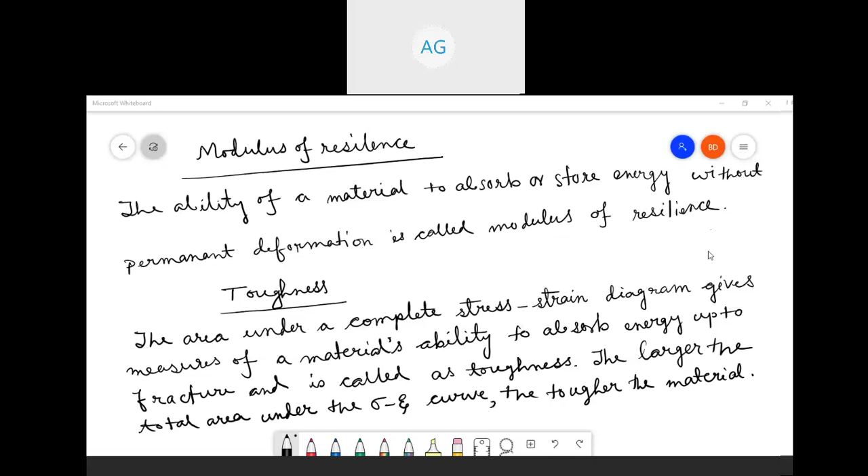So you should also be conscious about the things whatever you have not got. Every time he is telling about these things. So Ilyas, what is he saying actually? Do you understand? Yesterday, did I complete everything? Yes sir, or it was suddenly cancelled due to the time limitation.

You at least give me the last line of your notes from yesterday's class, so that I can understand up to where you reached. I think he is telling this, but because of his network issue his voice is breaking. So please help him, he is trying to do something. You are not backing him up, you people at least back him up, no? So do it, is it complete or not?

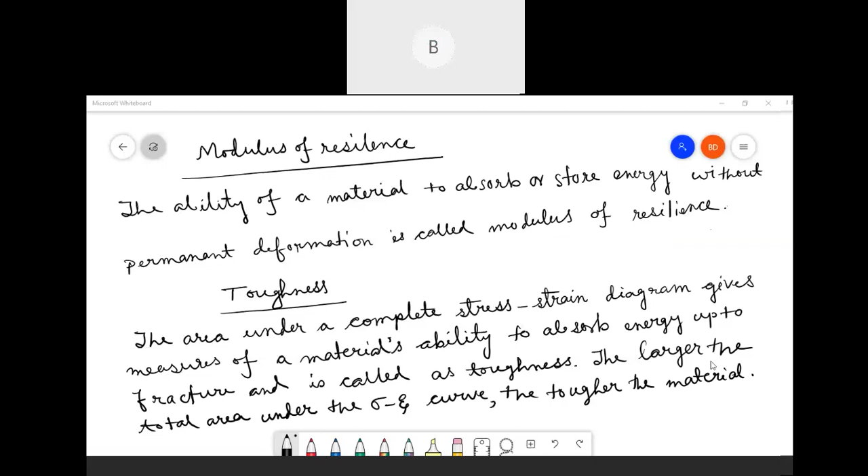This screen? Completed, sir. Okay, so you have to help your friend. If somebody wants to say something but is not able to express it, you have to help him.

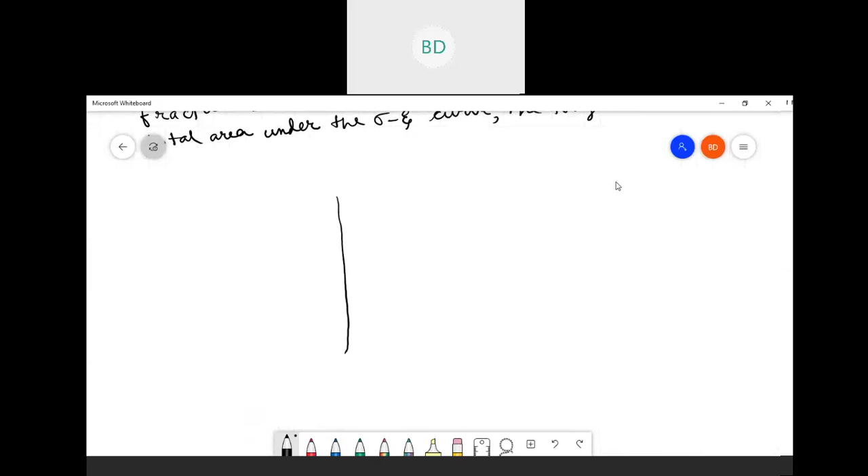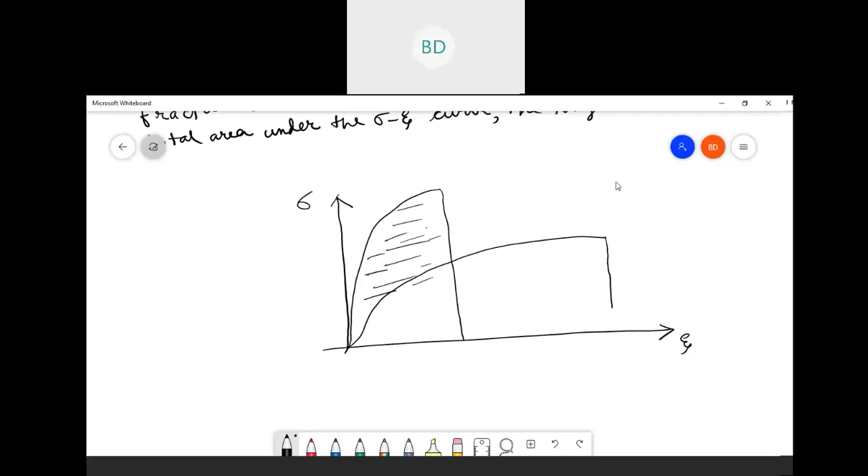Now you have to draw one diagram, this diagram is very informative actually, see how, I'll show you. This is strain, this is stress. Then drop a perpendicular line from here to here. Put some dash line. Then draw another curve. Draw a perpendicular line. So take a point here and drop a perpendicular line, this is also perpendicular. Mark this with another shadow. Then from here you draw a line like this.

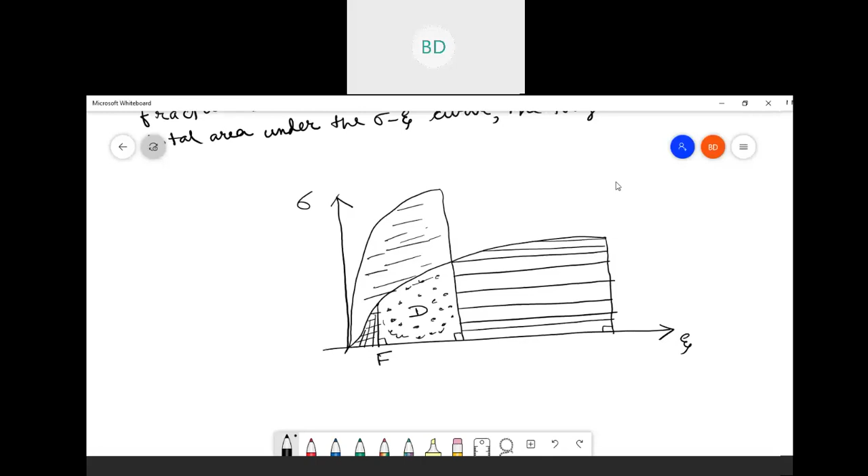I am showing the various regions under the stress-strain curve. So mark this point as F. Suppose this region is D, this region I am putting like this. So let me do one thing. Take this region, this point is your F.

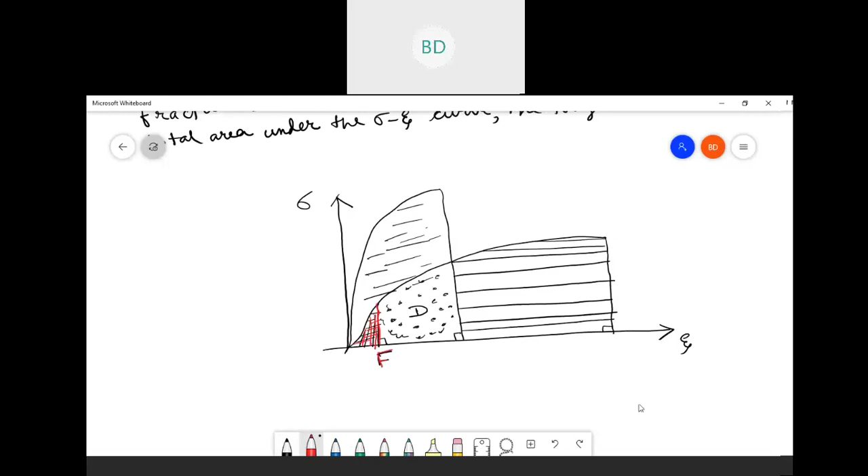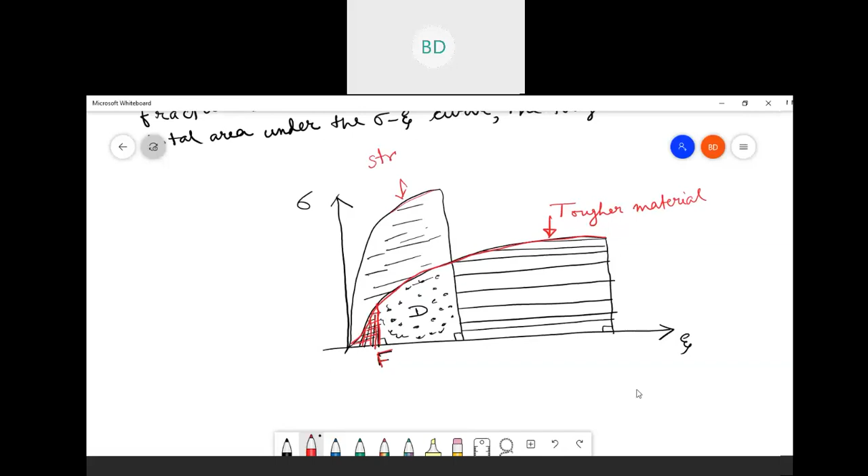So what is this curve? This curve is for tougher material because tough material is that which has more surface area under the stress-strain curve. So the area under this curve, if you look at, is more than this curve. So this is a tough material. And what about this? This is a strong material. Why strong? See, its sigma value, ultimate, that is UTS, sigma UTS, is high. And here you see sigma UTS is below, this is sigma UTS for the other material. So it is below, so it is a strong material, it is a tough material.

Then this portion, let me select another color. So this portion is your elastic resilience. Since it is under the elastic region, so it is your elastic resilience. What is resilience? Resilience is the ability of a material to absorb energy. So as a human being, if I want to ask, do you want a strong man or do you want a tough man? What would you like to have, which quality? Can you hear me?

Sir, can you hear me? Yes, sir, we can hear you.

Which quality do you want to have in you? Tough or strong? Do you want to be tough or do you want to be strong?

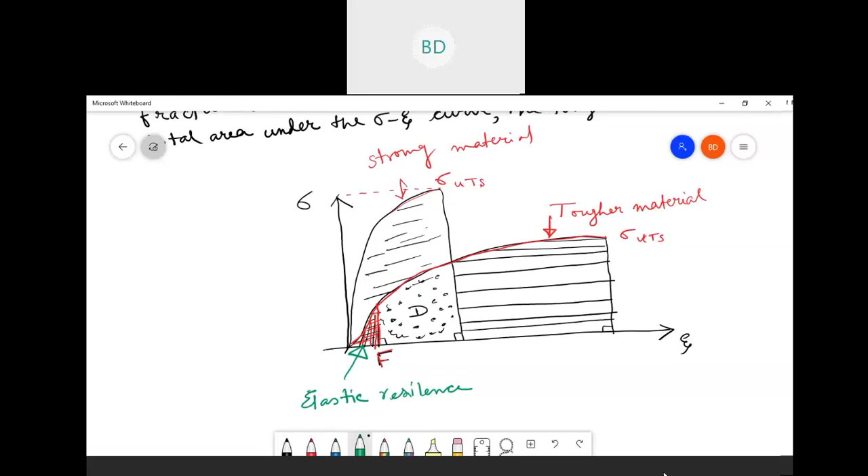So now you have to draw this diagram to understand the resilience, the strong material, the tough material. Okay, let's move on. Now one simple question we have to answer, exercise type.

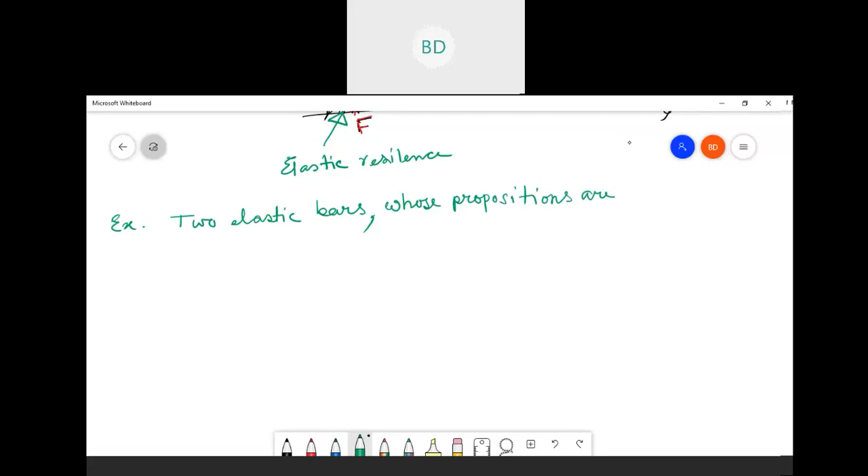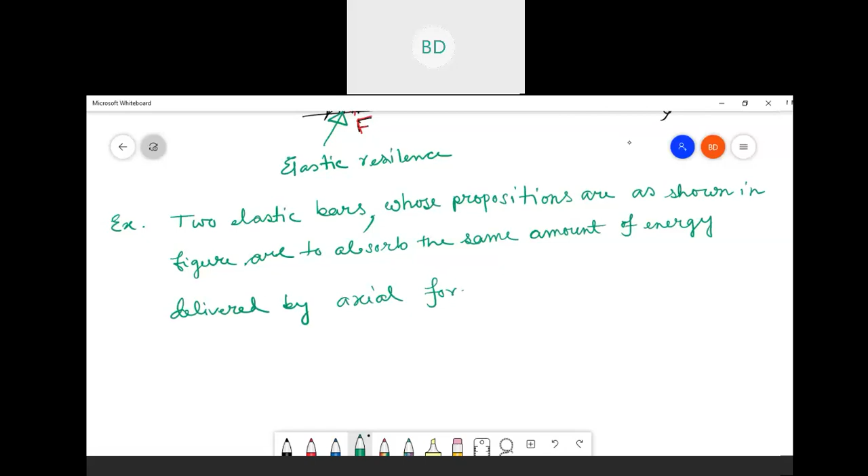Suppose two elastic bars whose propositions are as shown in figure. I'll draw this figure as shown in the figure, to absorb the same amount of energy delivered by axial forces at the free end, neglecting stress concentration. So do you know what is stress concentration?

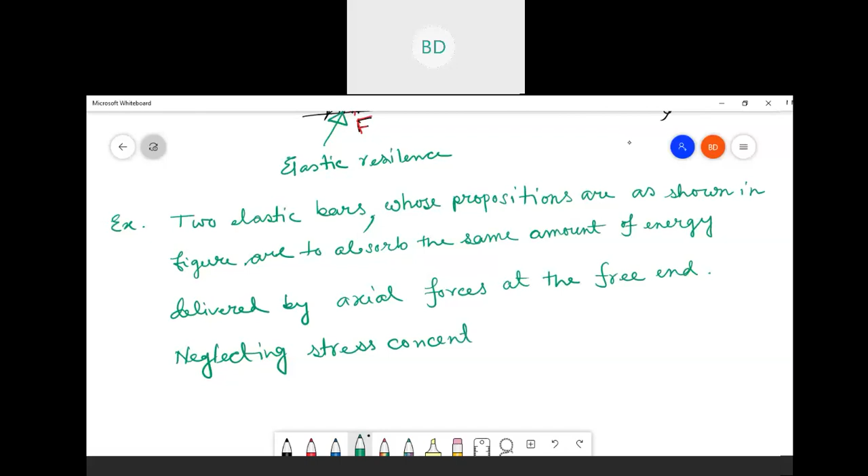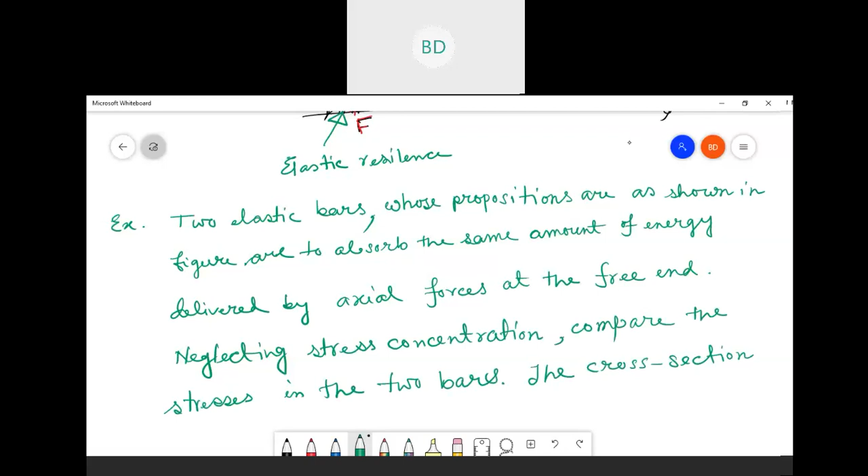Compare the stresses in the two bodies, in the two bars. The cross-sectional area of the left bar is A and that of the right bar is A and 2A.

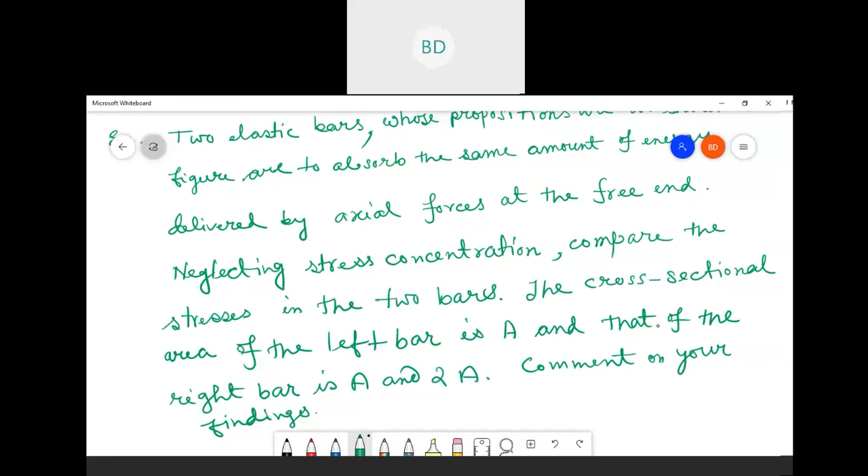Comment means comment on your findings, whatever result you got, you have to comment. Because as an engineer, your duty is not just to solve the problem, you have to explain, you should know the physics of the problem, why it has happened. That is very important from an engineering point of view, explanation. Now let me draw that figure.

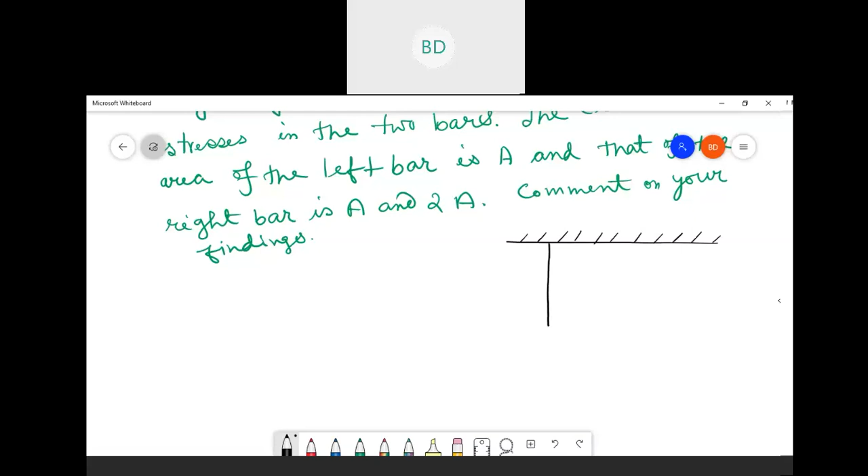So area of these two are A, and area of this bigger one is 2A. The length is L, and here it is also L but divided. This is your 3 by 4 L and this is your 1 by 4 L. So ultimately L. So both bars are of same length.

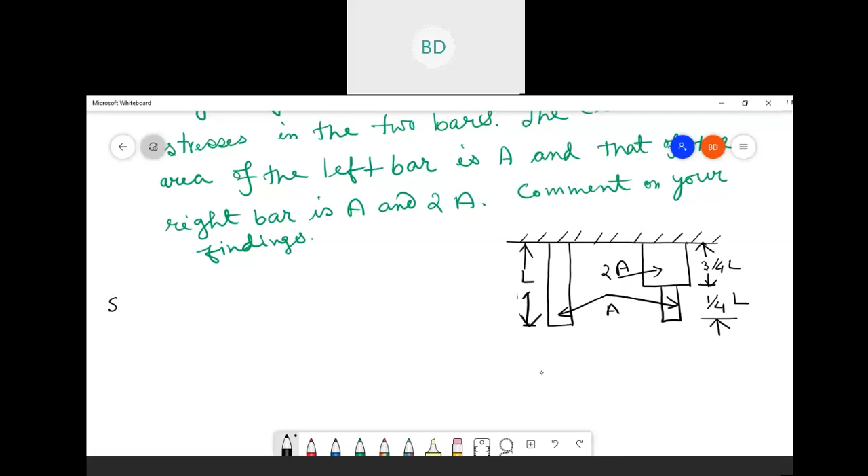Okay, throughout the normal stress, therefore the normal stress sigma 1 is constant throughout.

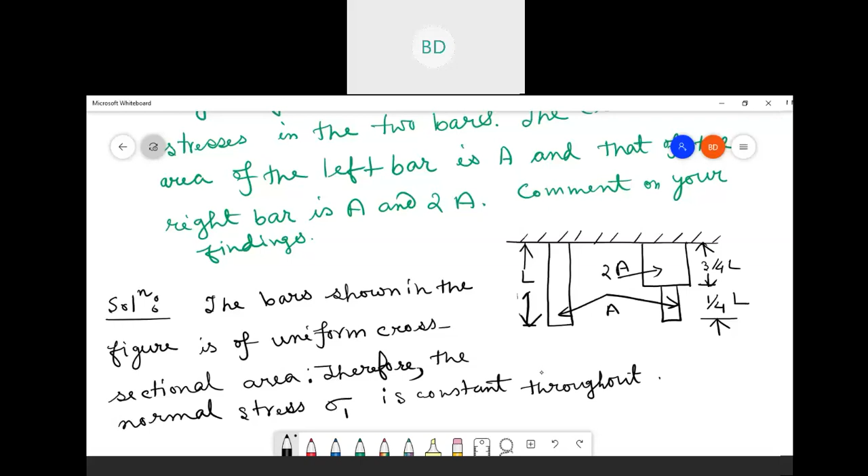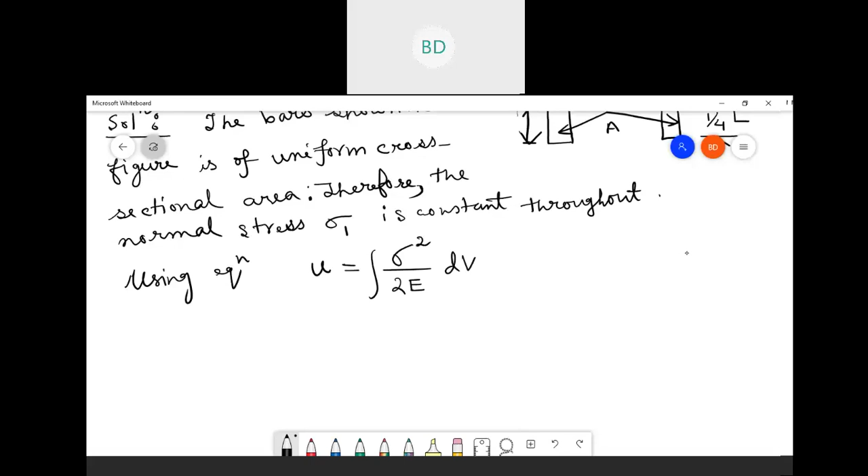Using the equation, so yesterday you have encountered an equation. I'm going to write it now: U equals sigma square by 2E dV. E, why does it always happen this way? dV. So this equation you have got. So this is actually volume integral. Now the thing is that it is a general equation.

Now here there are three parts. So now you have to put subscript 1 here, so that we are working for the first bar, left one. So this will be sigma 1. Using this equation and integrating over the volume V of the bar, the total energy for the bar is written as...

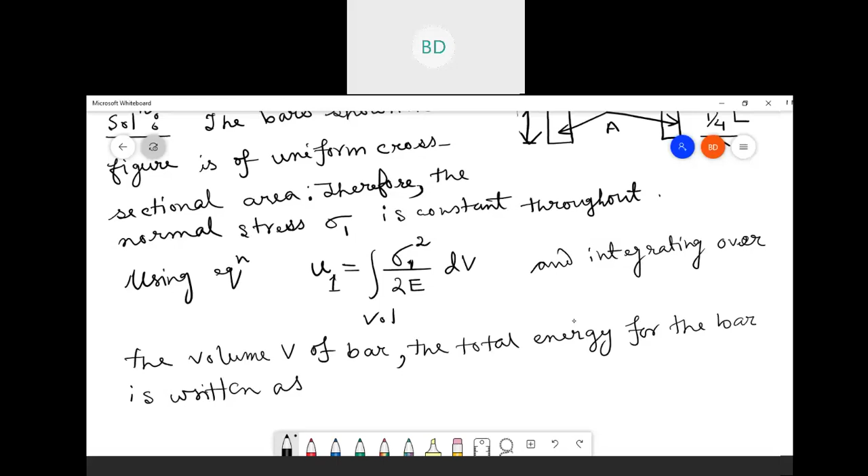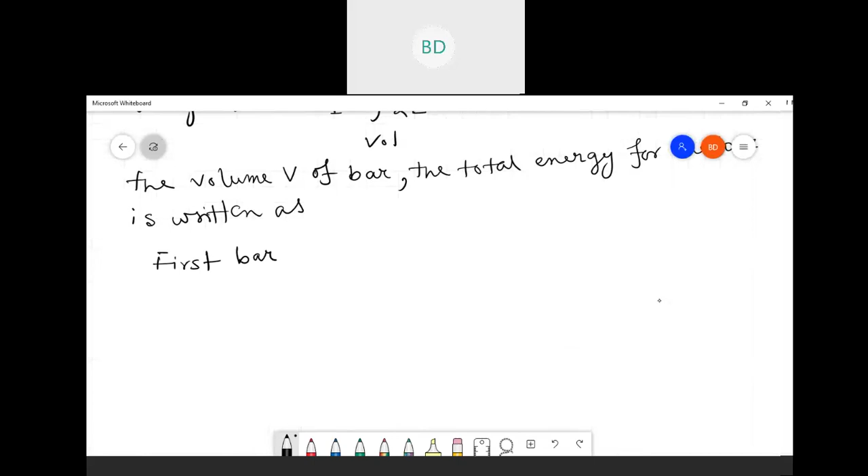So for the first bar, U1 is equal to, using the formula, volume integral over V, directly you can write sigma 1 square by 2E into dV, which is equal to sigma 1 square by 2E times integration dV, which is ultimately area into length.

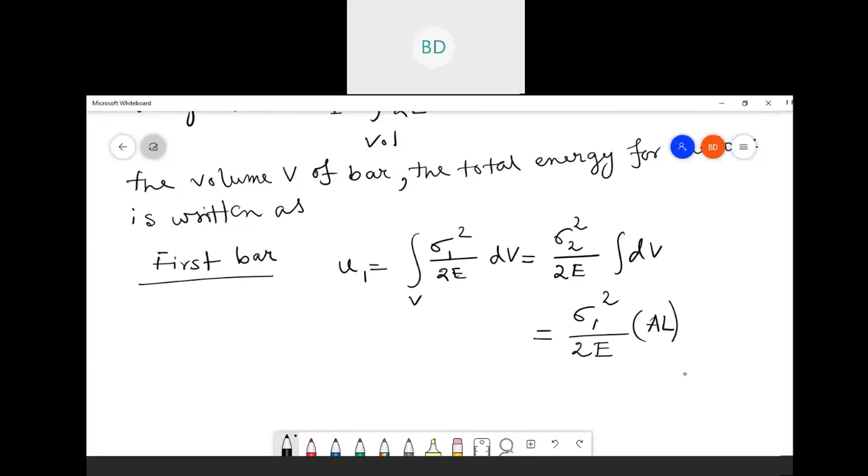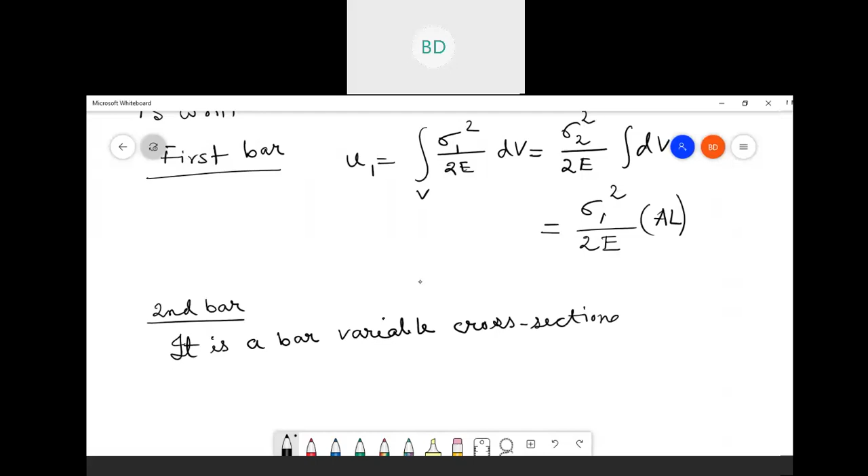So for the second case or second bar, if it is a bar of variable cross section, for the second case you see there are two areas. One is A, another one is 2A. It is a bar of variable cross sectional area. Would you be able to follow me? Yes, sir.

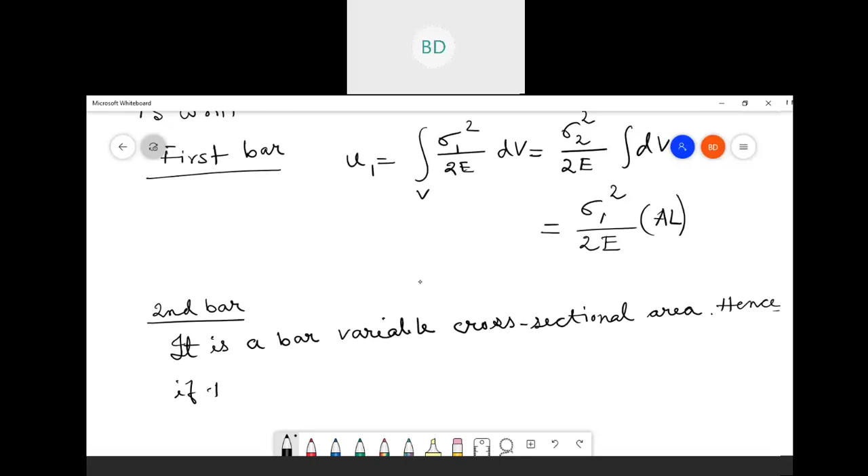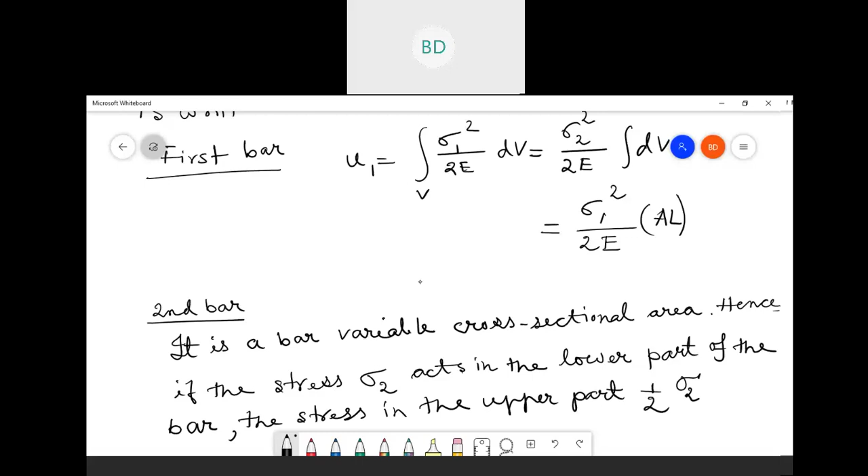Hence if the stress sigma 2 acts in the lower part of the bar, the stress in the upper part is sigma 2 by 2. Because the area is double, the stress will be half. Area is inversely proportional to the stress.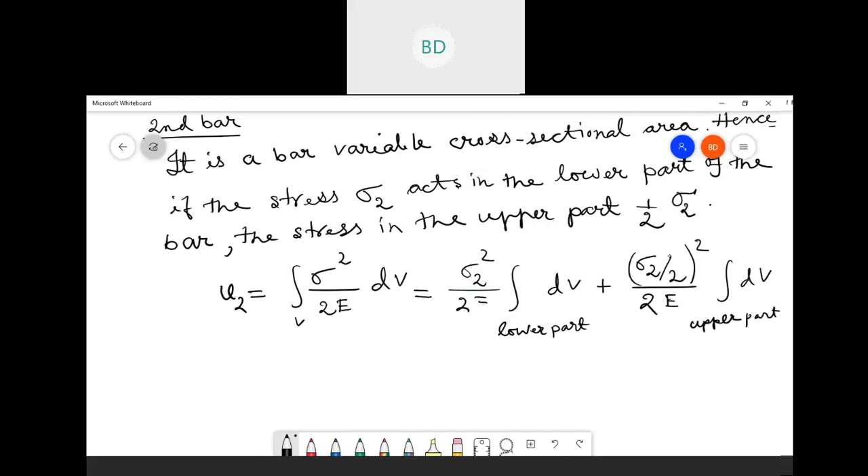So finally you will get sigma 2 square by 2E into A L by 4, plus sigma 2 by 2 whole square by 2E into 2A times 3L by 4, which is equal to sigma 2 square by 2E into 5 by 8 AL.

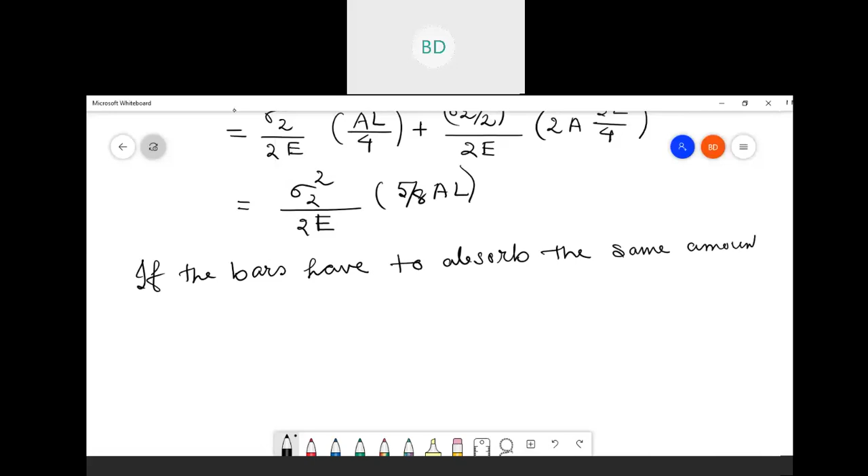If both the bars are to absorb the same amount of energy, which is given in the question, that means what? U1 should be equal to U2, or what do we get?

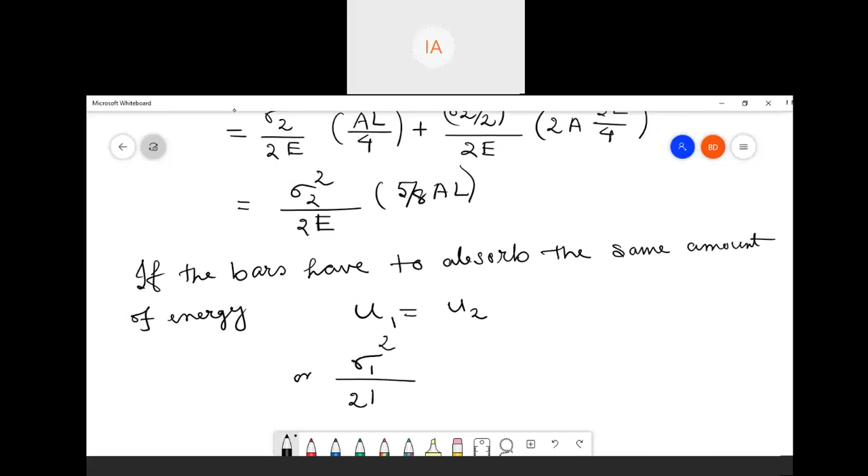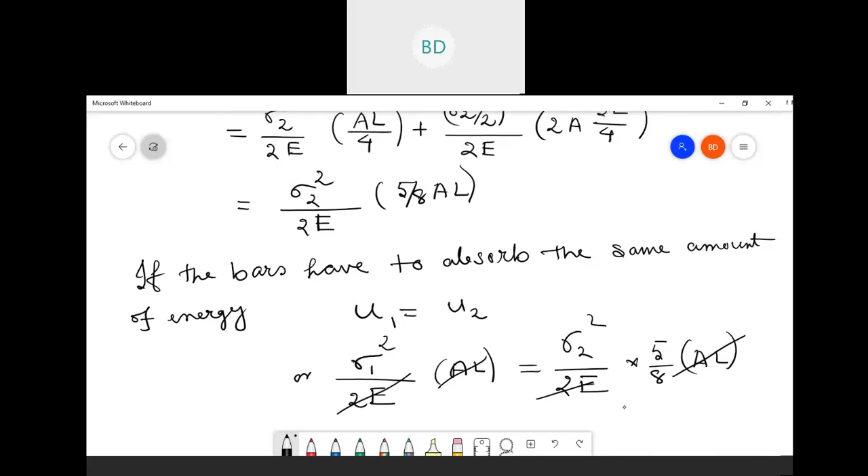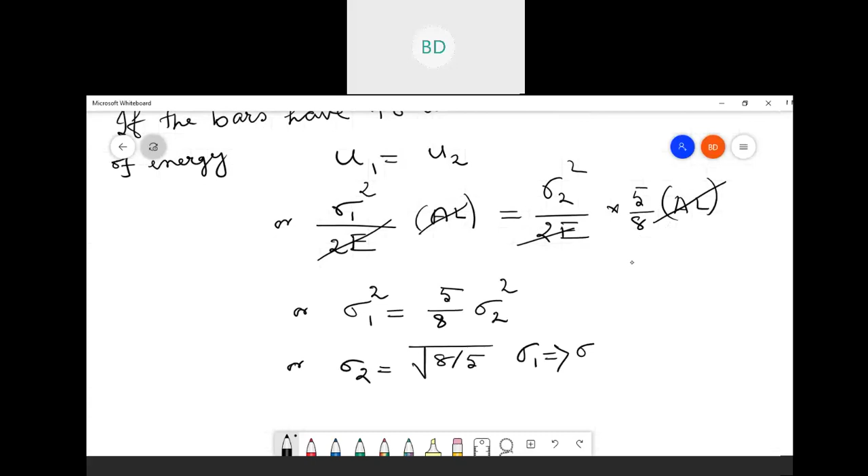So sigma 1 square by 2E into AL is equal to U2, which is sigma 2 square by 2E into 5 by 8 AL. So this AL gone, this 2E gone, so we are left with sigma 1 square is equal to 5 by 8 sigma 2 square, or we can write sigma 2 is equal to root over 8 by 5 into sigma 1. That gives sigma 2 is equal to, if you take the square root, 1.265 sigma 1. So this is our answer.

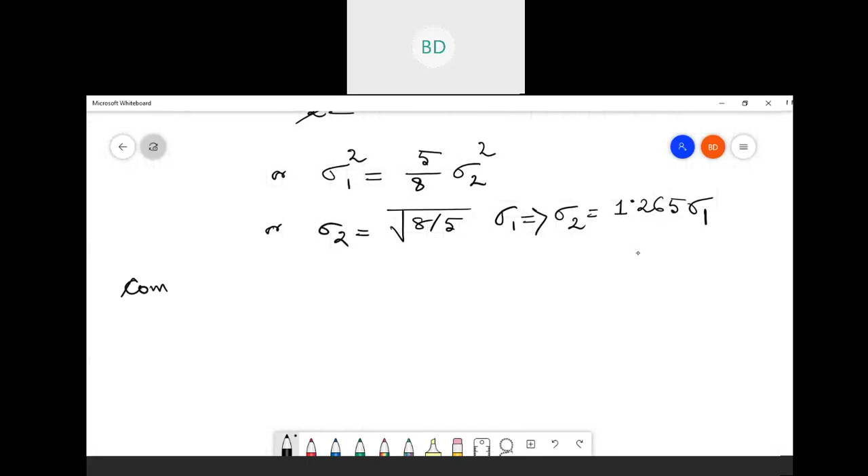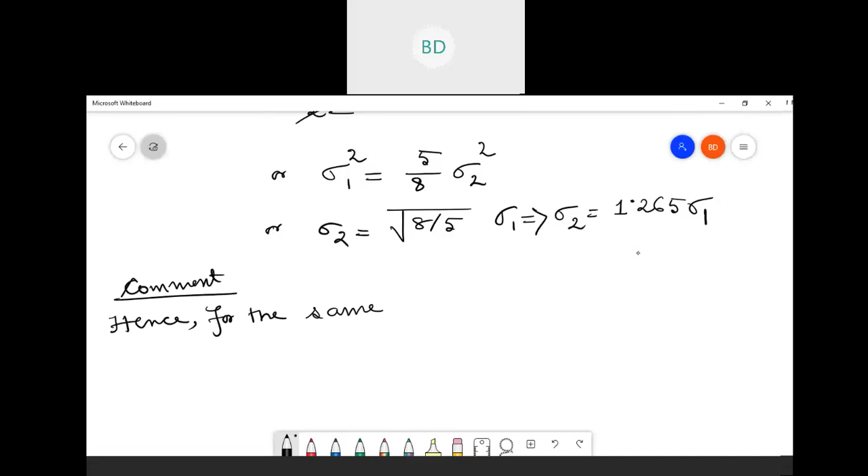Hence for the same energy load, the stress in the... one term I'm going to use, that is reinforced. Reinforced is actually something that is enhanced with strength by applying some external agent. Okay, like your RCC, reinforced cement concrete. So reinforced means some additives you have to add.

So the second part we can call reinforced, because there are two areas. Reinforced bar is 26.5%. See, sigma 1 is lesser than sigma 2, so stress in the second part will be higher. That is, the reinforced part has higher stress than the plain bar. So stress is much higher than the plain bar.

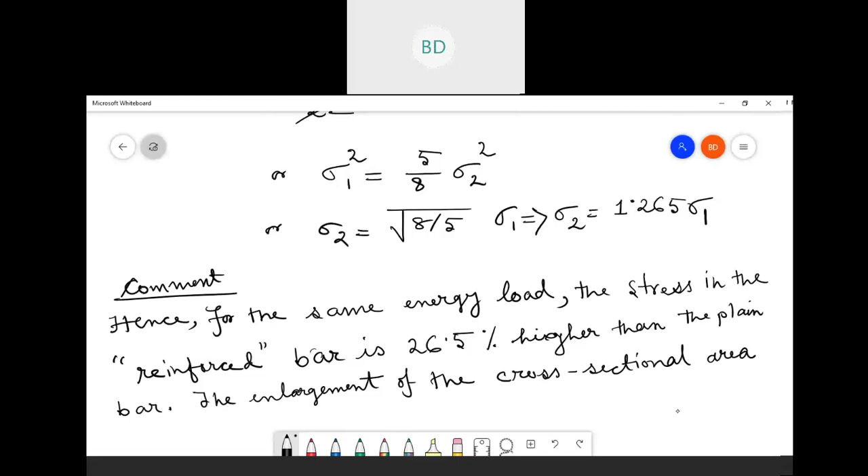The enlargement of the cross-sectional area over a part of the bar is actually detrimental.

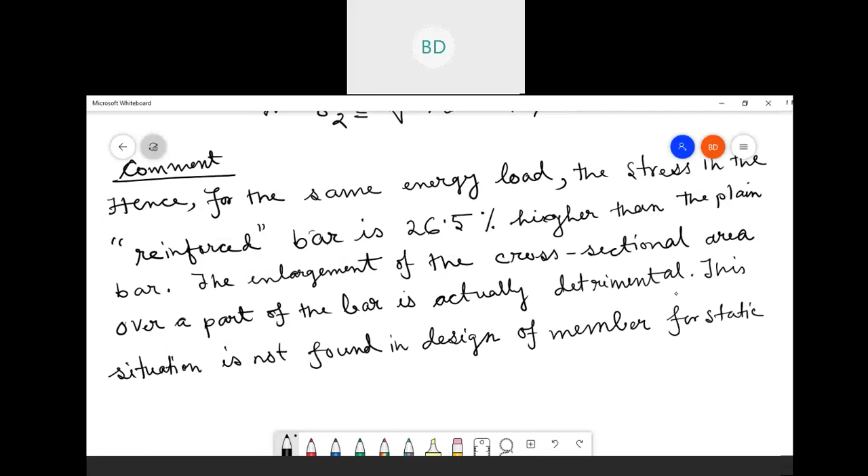This situation is not found in design of members for static loads. For dynamic load it may be a different issue, but for static loads, you should not use this type of reinforcement or varying cross-sectional area. Okay, so this is over.

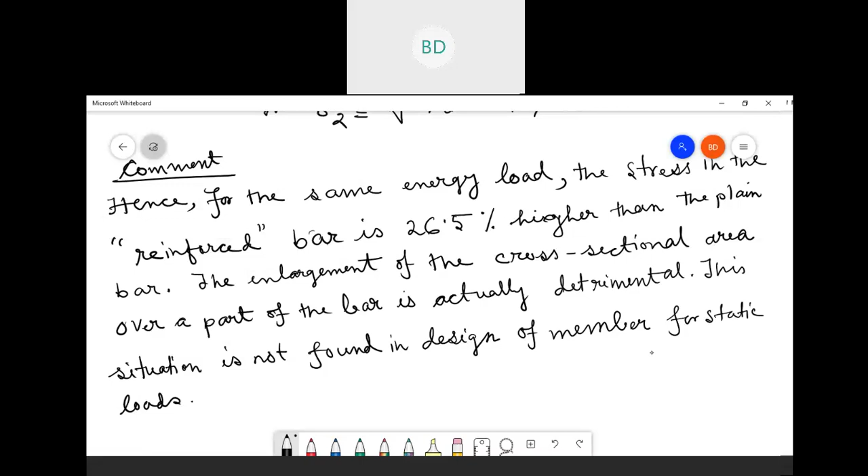So probably for the next topic we will not have sufficient time. It will take longer, so better not to start today. But I want to say something about stress concentration. So this is over, no? This is over? Yes sir.

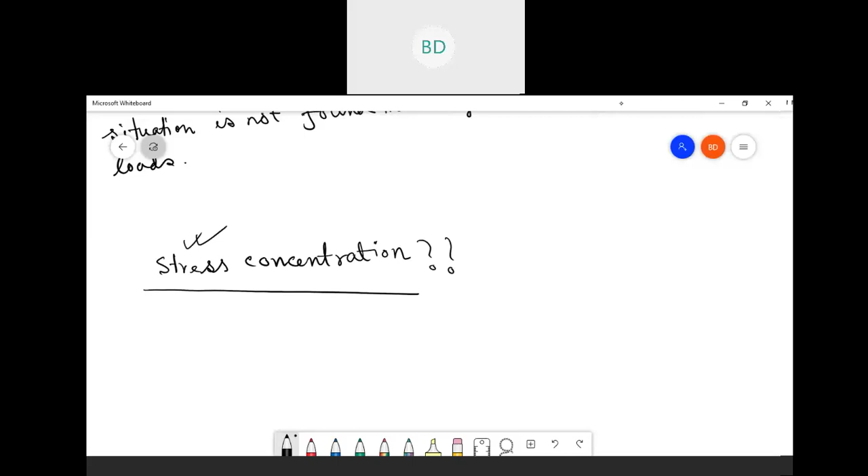Okay, let me introduce one term. Probably you encountered this in an earlier semester. Stress concentration, any idea? What is stress concentration? You know stress, sigma, that is load per area. But what is concentration? From chemistry you know concentration, molarity, right? So in material science or fluid mechanics, how does that come in? So actually, what is stress concentration?

Suppose you have a very pointed tip, and at this point, suppose this point is A, you put a load over here. Suppose you gave some load P. Let me call this point B, because I'll use A for area. Suppose this is point B. At point B you have put a load of value P. So here, definitely cross-sectional area is very less, almost negligible. That means here stress will be high.

Stress will be high. But now if you do it like this, and take point B, put the weight P, now see your area is not that small. It is significantly higher because before the area was very less. So here sigma will be less than before. So stress concentration is the term used for this type of pointed tip.

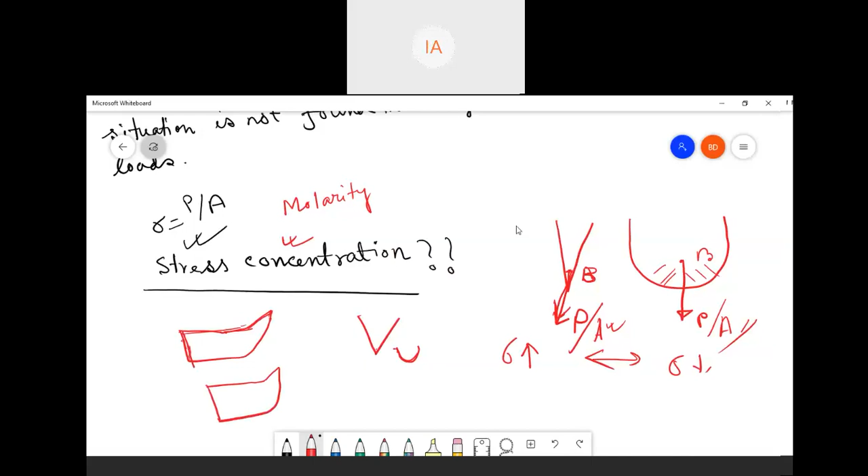Do you remember what this is? What is it? Is it a broken Titanic, after an accident? Is this the Titanic or something else? What is this? This is not Titanic. This is a single point cutting tool, from your workshop theory, lathe machine.

Can you remember? If you take a single point cutting tool, you will see this tip is not pointed, it is a little bit rounded. So there is a term called nose radius. Probably in your viva I asked about this particular nose radius. So things are a little bit blunt or curved, not pointed, so it may get break otherwise. That is the stress concentration: if your area of cross section is very less, too less, then the stress will be very high at that point. That is called stress concentration.

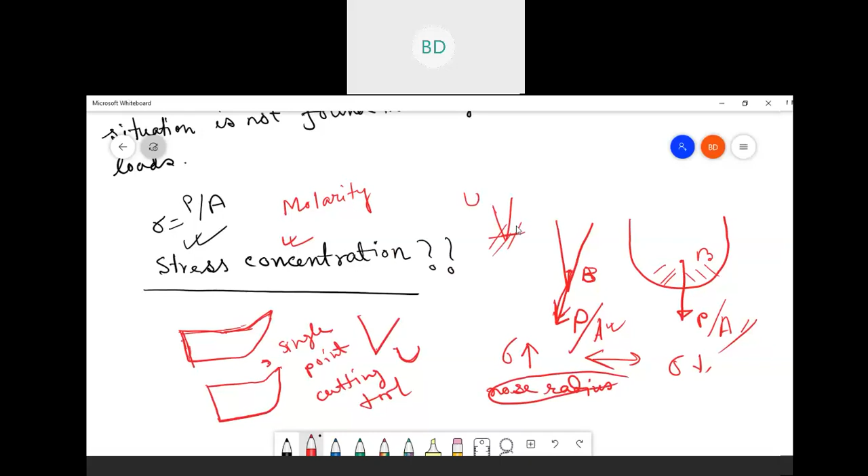As an engineer, you should avoid stress concentration while designing mechanical parts. Okay, fine. Have you taken the attendance, Bhagirath?